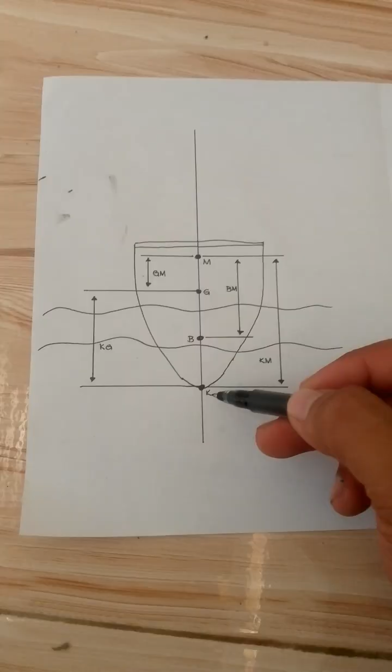So, the key nomenclature for initial stability is the keel. Keel: the origin point for vertical measurements, usually the top of the keel. Next is the center of gravity, the point through which the total weight of the ship acts downward. Center of buoyancy: the center of the underwater volume.

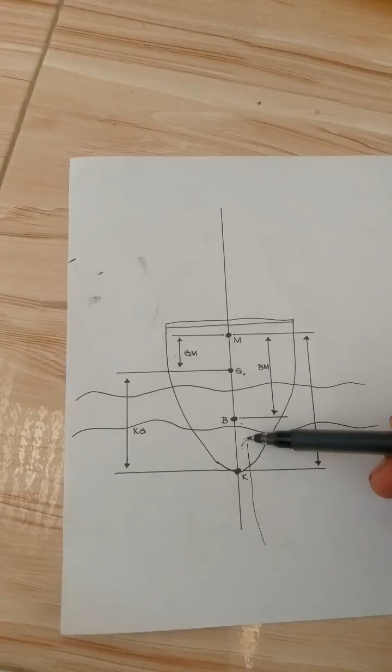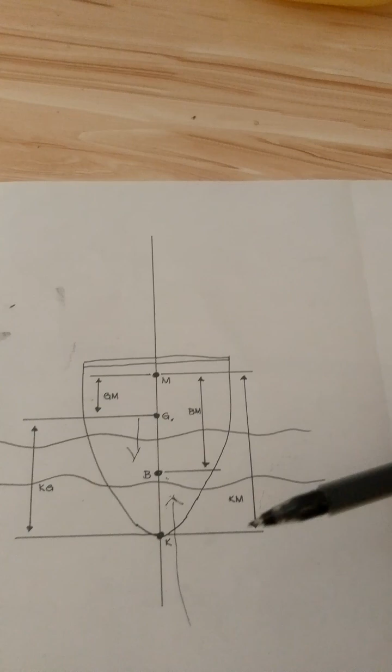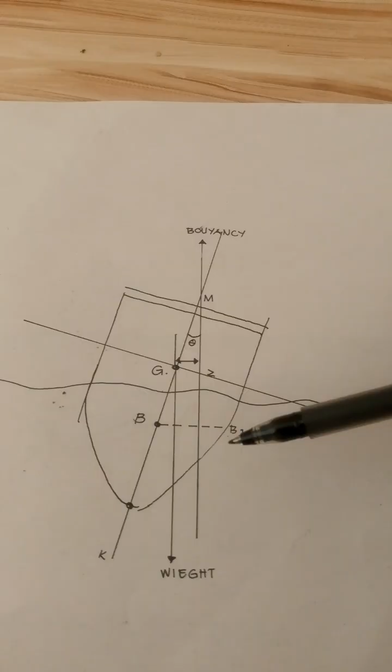The center of buoyancy, of the underwater volume, is the point through which the total buoyancy force acts upward. So, the metacenter: the intersection point of the vertical line through buoyancy when the ship is upright and the new vertical line through buoyancy, B1, when the ship is slightly inclined. The metacentric height, the distance between the center of gravity and the metacenter, is the primary indicator of initial stability.

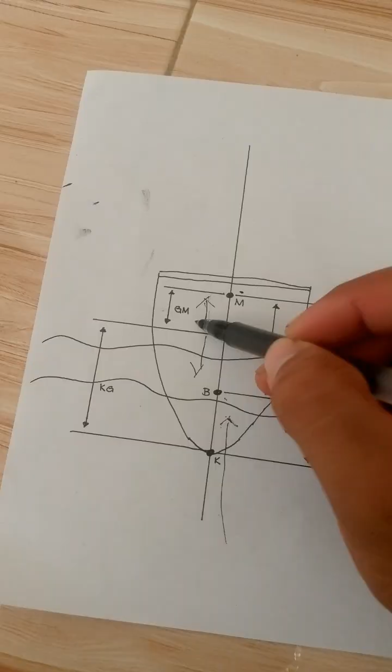So, the righting lever: the horizontal distance between the center of gravity and the buoyancy.

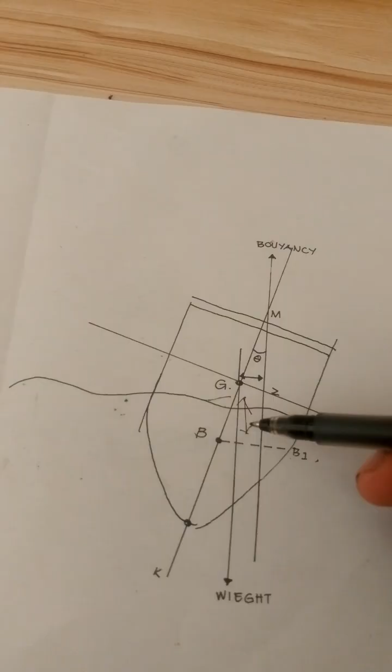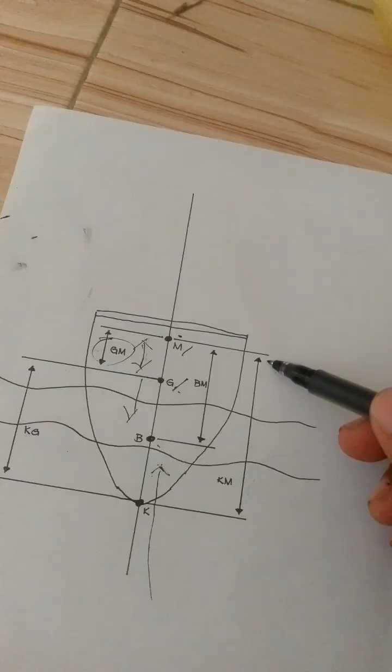For small angles. So, the height of the metacenter, which is KM: the height of the metacenter above the keel, KG plus GM, from keel to metacenter height. KB, height of buoyancy, from keel to center of buoyancy.

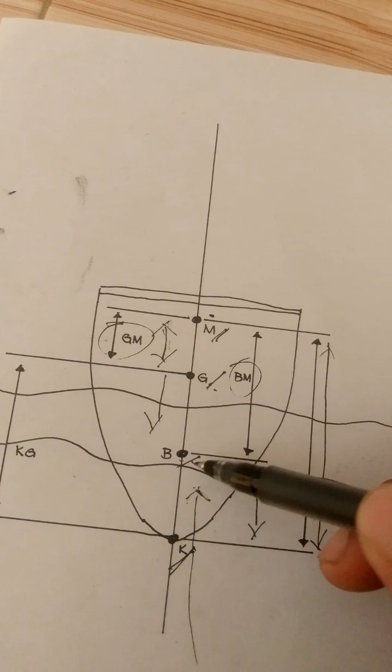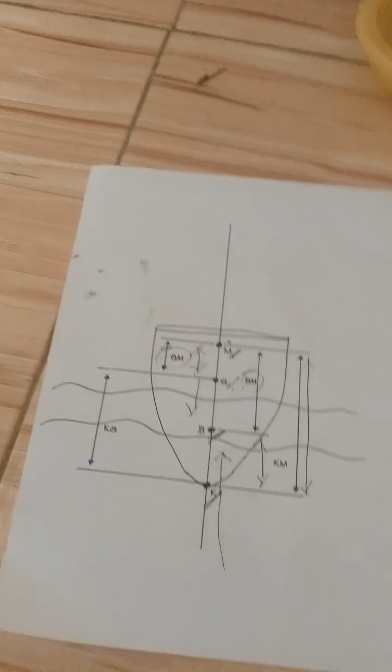Metacentric radius, BM, the distance between the center of buoyancy and the metacenter, from center of buoyancy to the metacenter. Angle of heel: the angle at which the ship is inclined. Displacement: the total weight of the ship, as cargo is loaded or discharged. For stability conditions, we have stable equilibrium, where the metacenter is above the center of gravity. The vessel returns to upright.

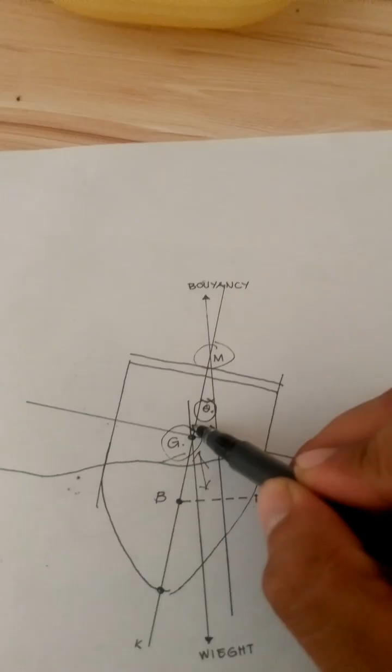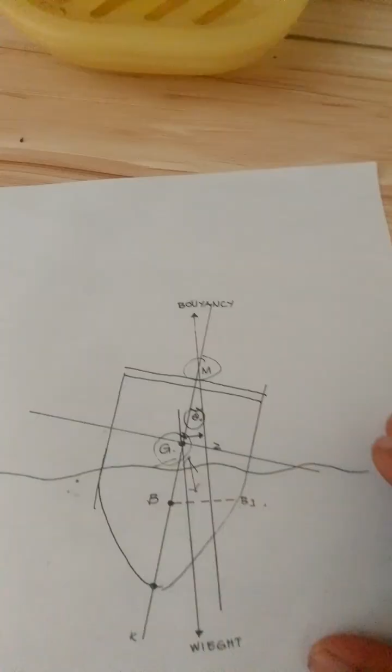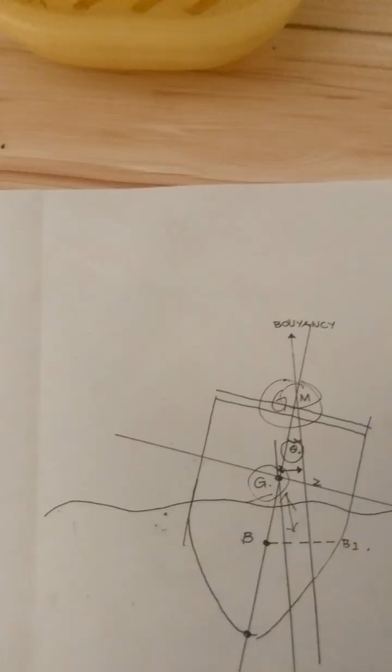For neutral equilibrium, the metacenter coincides with G, the center of gravity. The vessel remains at the inclined angle. It cannot be returned to its upright position.

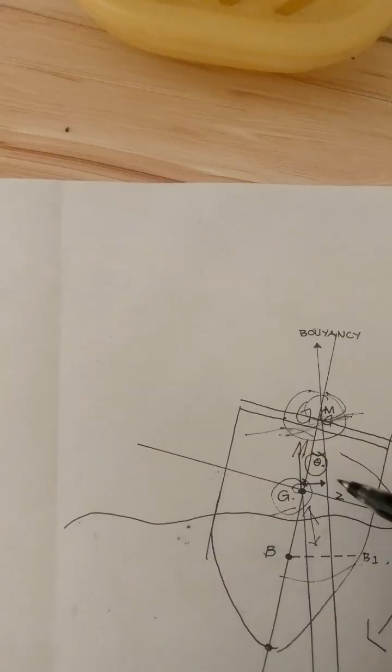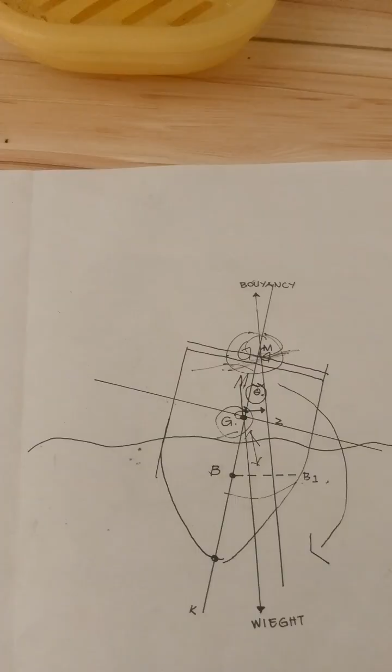The higher the GM indicates strong initial stability but can cause uncomfortable, jerky, and quick motions, whereas a low GM provides a more comfortable, slow, but less stable motion.

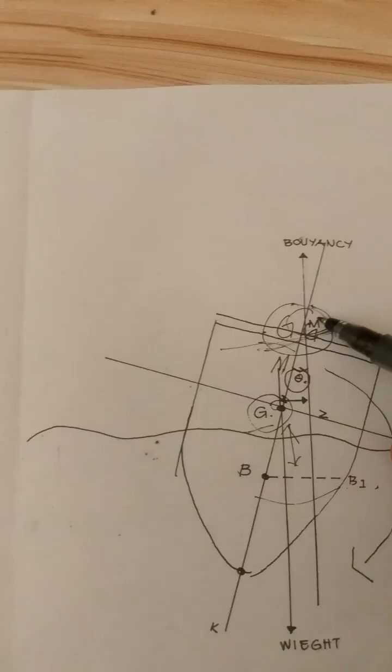So, that's all for the discussion about the initial stability of a ship.